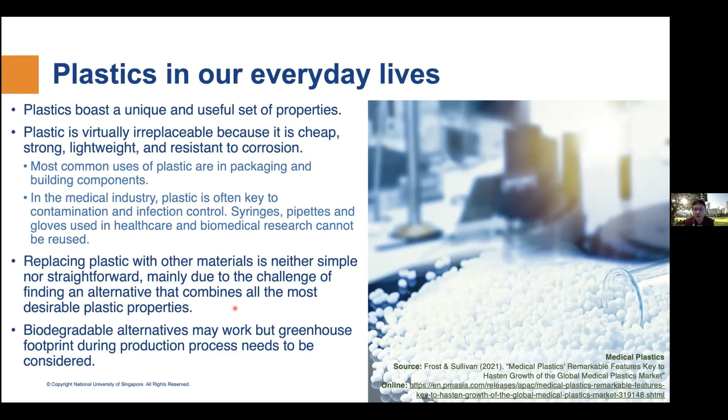Biodegradable alternatives may work, but the greenhouse footprint during the production processes needs to be considered for a holistic life cycle assessment. And as such, we know that we will have to live with plastics, and the waste that comes along with plastics. So this brings us to the issue of the waste management problem that is associated with plastics production and plastics use.

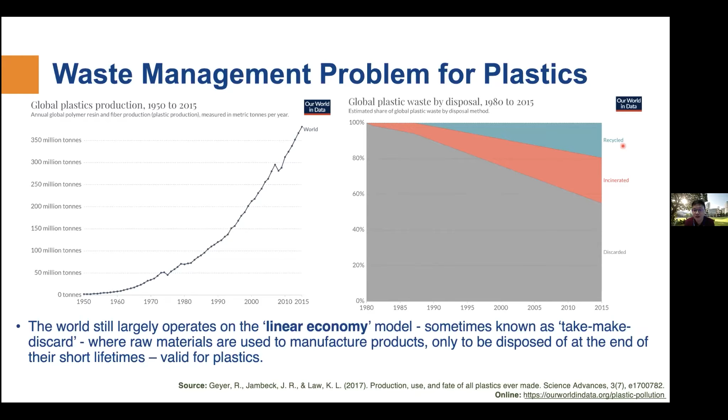Now, the fact that plastic waste is mainly discarded or incinerated shows that the world still largely operates on a linear economy model, also known as a take, make, and discard concept, whereby we use the raw materials to produce the products, only to dispose of them at the end of their short lifetimes. And this obviously is creating a problem with waste.

The most common plastic waste globally includes, number one, LDPE, low density polyethylene, followed by PP, polypropylene, followed by PP&A fibers, which are polyester, polyamide, and acrylic fibers, HDPE, high density polyethylene, and PET, which is what you see for plastic bottles, like polyethylene terephthalate.

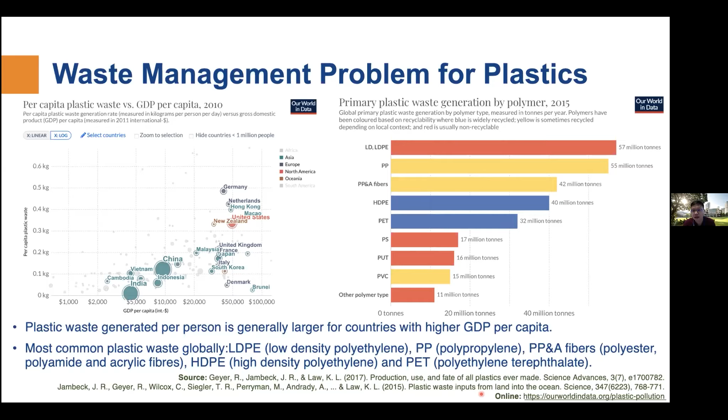So how would plastic waste pose a burden to urban cities? Number one, it will place pressure on landfill space, especially in a very highly dense island state like Singapore. There is already a space constraint for cities.

As a city gets more and more urbanized, there is a high increase in density for the urbanized core, and there will be urban sprawling. Eventually, there will be pressure on finding space for landfill.

Once the space has been dedicated for landfill, from an urban planning perspective, it will create some long-term risk considerations, including perhaps soil and groundwater contamination due to the breakdown of the byproducts of plastics.

And once it's buried, we do know that there is no material recovery. And in some cities around the world, landfilling tax may be introduced to ease the pressure on dumping incinerated waste into landfill.

Now, incineration also poses another problem because toxic gases are released into the environment, especially during the thermal degradation of PVC. As such, there is usually a need to invest in costly infrastructure for air quality management.

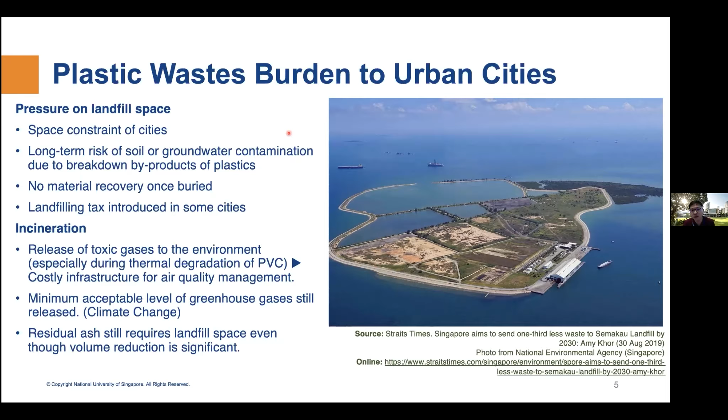Now, if we are not able to do the incineration, or there is a constraint on landfill space, what could urban cities or countries do?

Some cities may choose to export their waste. Usually it will be exported to developing countries, but developing countries usually may not have the infrastructure to minimize the greenhouse gas production caused by incineration.

And there may be mismanaged plastic waste, especially in coastal regions, which can have serious implications to the environment.

And it may not be a reliable option for the long term, especially when waste importers such as China stop accepting waste. This would place a burden on reusing or actually disposing of the plastic waste or general waste.

Now, should the waste be reused, then there is a need to consider the impact of such waste reuse on the urban environments in cities.

For example, recycled materials and the use of recycled materials should be comparable to existing materials over the entire life cycle. This is expected for any new material or recycled material that is going to be developed in this process.

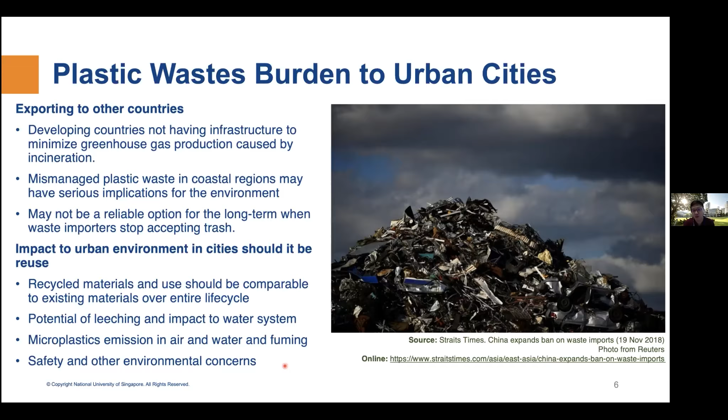Now, one possible solution is to use plastic waste on roads, and hence the topic of today's presentation. Plastics on roads could be used as a means to actually divert plastic waste away from the landfill and the expensive incineration process.

That are at risk of harming the environment, and instead put them into the pavement infrastructure that already occupies the city's lands. So the thing that we need is to find an economical solution to make it work.

Now, plastic materials are being recovered in the process and repurposed. Hence, we are trying to create a circular economic model for plastics by generating demand at the end of its lifespan. In other words, we are looking into the sustainability aspect of this issue.

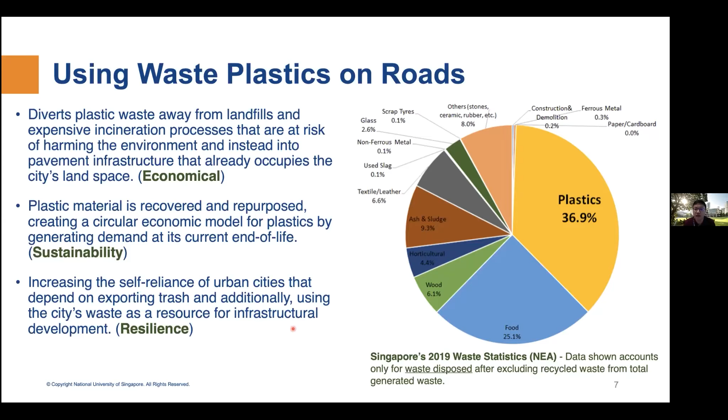Last but not least, it increases the self-reliance of urban cities that strongly depend on exporting waste to other cities or countries. Additionally, we are using the waste as a resource for infrastructure development. So these are some of the potential benefits of using waste plastics on roads.

Now, traditionally, there are two approaches of adopting waste plastics on roads. Typically, the waste is collected, then sorted based on type and cleaned to make sure there is not much contamination, so that it's suitable for use as construction materials.

And then the plastics may be converted to pellets, shredded to about 1 to 2 mm size, or ground into powder, depending on the use of interest. Thereafter, there are two approaches that we may adopt in road building.

First is what we call the wet mixing approach, whereby we add recycled plastics into bitumen at high temperatures, typically higher than 150 to 170 degrees Celsius, to form a homogeneous modified binder or bitumen solution before addition into the asphaltic concrete mixture.

Another approach is to treat the pellets or powder as mineral fillers or dust and replace a proportion of the aggregates used in the mix, then mix into the asphalt concrete mixture. Now, at this point, certain methods are actually proposing to first coat hot aggregates with plastics as a potential treatment method as well. Either way, the final product would be a plastic modified asphaltic concrete, and these should be tested for use in pavement construction.

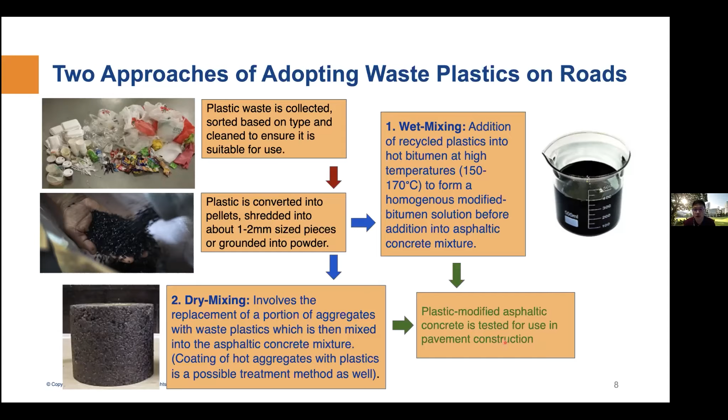Now, past studies on plastics on roads from an academic perspective tend to focus on numerical modeling and simulation. For example, the studies by Liang et al. actually model the LDPE in a tube test under hot storage conditions for a wet mix, in binder form. The one on the bottom basically shows a review done by Wu and Montalvo in 2020 that looks at the possibility of using different plastic types on asphalt and asphalt mixture performance and their general performance in this process. It's a literature study on this effort.

Now, if we are looking into mix design and testing, unfortunately, most studies in the literature tend to be focused on clean or virgin plastic type and are not really focused on waste. And this is a research problem that is to be looked into.

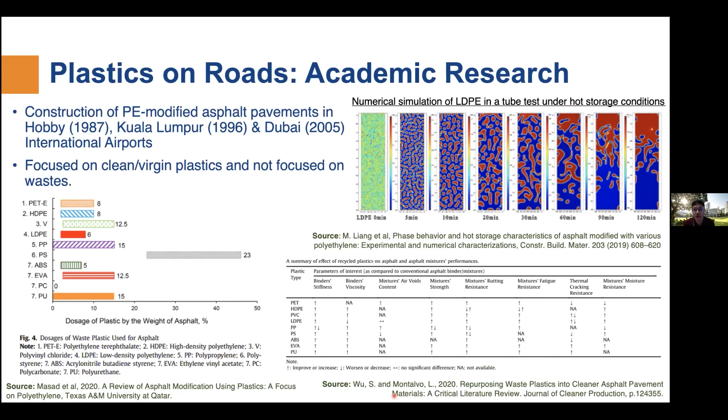Now, from a translational research perspective, we can also learn from the use of waste plastic on roads from other countries. For example, in UK in 2019, research and trials for real-world tests across 8 local authorities in Buckinghamshire, Bedfordshire, Cumbria, Staffordshire, Kent, Reading, Suffolk, Solihull, and Birmingham in the UK have been tested using plastics modified asphalt.

In Tasmania, a stretch of road has been built using additives, basically a wet mixing approach, made from plastic bags, bottles, and toners. These toners are basically in the dry mixing approach. So for the plastic bags, it will be wet mixing; glass bottle and toner, basically dry mixing approach.

In Thailand, they have started some experimentation on plastic use in roads. Indonesia has a 700-meter plastic road, where the plastic is melted and added to tar to make roads, done in Bali. And in India, where plastic modified asphalt roads have been used, over 100,000 kilometers have been built.

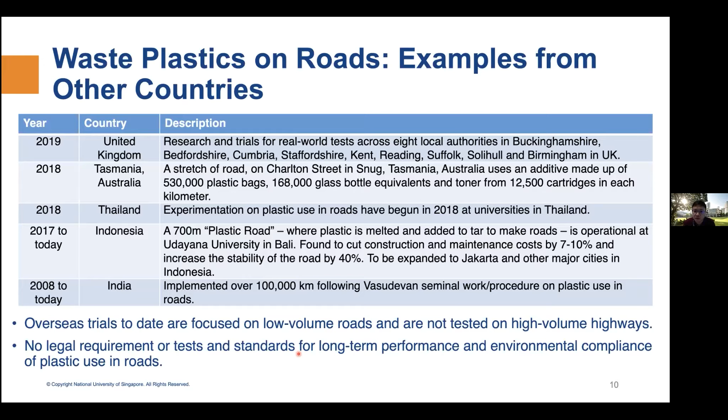Will these roads with recycled plastics pollute our water resources? Are they going to fume? Or are they going to perform as well as the current conventional asphalt mix that we have, in terms of structural performance and functional performance? Hence, in the next few slides, I will talk about the challenges for urban cities in using recycled plastics on roads.

Now, despite the past trials, cases, or implementations in other countries that I've mentioned, and I've mentioned that they are on low volume roads, what's so unique about urban cities? The first thing we think about is that there has to be a waste collection system and a waste sorting system in place. And for urban cities, it's a little bit more challenging in this aspect.

Now, in terms of waste collection, production of virgin plastics is often much cheaper than recycling plastics, and this can make recycled plastics on roads a much more cost-inefficient manner for application.

Mechanical recycling processes are expensive, and we are not able to sort the plastics efficiently. This is especially so in urban cities, where the infrastructure has already been constructed, making it extremely difficult to modify or create a new waste collection system in a developed urban framework. In terms of contamination, plastic waste collected may be contaminated from use and must be cleaned before it can be repurposed. So these are some of the challenges from a waste collection point of view.

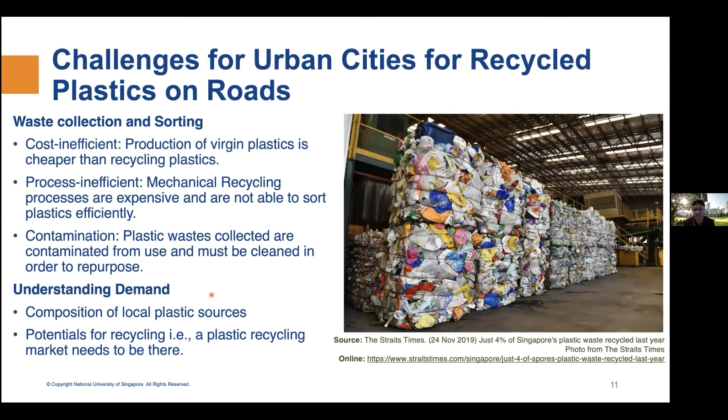Now, once we understand this part, the next part will be to look at the performance issue. Long-term life cycle costs to agencies and users should be equal to or better than the existing pavement being built. In urban cities it's extremely difficult, because the concerns are very different from local and private roads, mainly due to legislation and public expectations. Typically, urban residents have higher expectations on environmental quality, noise, air quality, or even water reuse. These are very intimate concerns, even safety.

The next one I want to talk about is environmental health and concern, because workers may be exposed to toxic fumes, even though past research studies showed there isn't really a significant difference. Or when microplastics break down and leach into water sources and ecosystems. So these are things that need to be investigated.

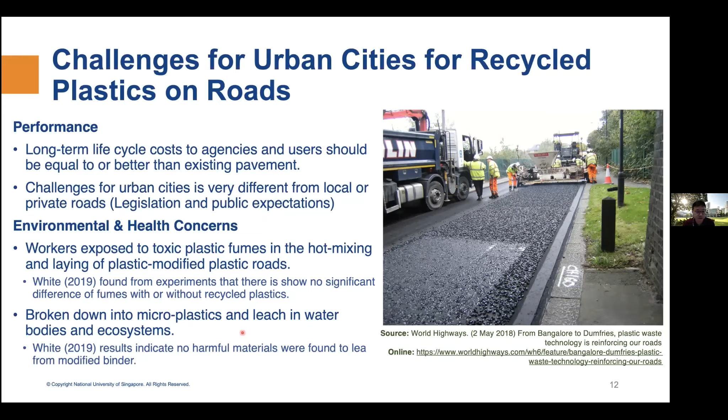Last but not least, there may be a lack of incentive or public infrastructure for plastic recycling, which I mentioned briefly earlier. Many urban cities are already very well developed and planned from an infrastructure planning perspective, and there is really a lack of public infrastructure for plastic recycling or sorting.

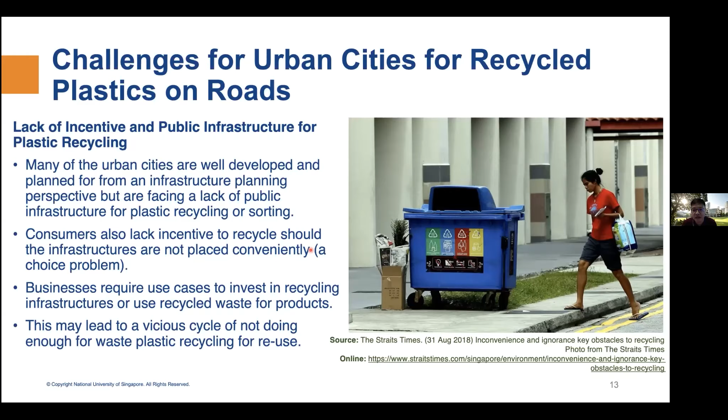Without such infrastructure, it's a chicken and egg problem. Consumers find there's a lack of incentive to recycle because there's simply a lack of infrastructure, or it's not placed conveniently. Likewise, businesses find there's no use case to invest in recycling infrastructure or to use recycled plastics or waste for products. You can see that this starts to lead to a vicious cycle of not doing enough for plastic waste recycling. So how to break this cycle is something important.

Now, in terms of that, we can look into the opportunities for urban cities. I'm going to use the Singapore context, on what we at NUS are doing, as what we are going to talk about. In terms of opportunities, the first one we'll look at is: can we actually learn more about plastic waste collection, sorting, composition, and the quality for road use?

We all know very well that Singaporeans use 1.76 billion plastic items per year, yet less than 20% of them are being recycled. Other urban cities also face similar challenges. But we should not see this as a challenge—we should see this as an opportunity.

We can actually study the waste generated from a categorical point of view, spatial point of view, and temporal point of view, because this leads us to understand more about what's being collected. If we know what's being collected, we can design waste collection and sorting mechanisms for a circular economy appropriately. From a long-term perspective, we can also study the implications on mix quality and long-term pavement performance that needs to be assessed. This will also lead to building good quality control and quality assurance guidance or standards for the plastic pellets or waste pellets generated for reuse, since we're now looking at providing a use case for investment to come into the circular economy framework.

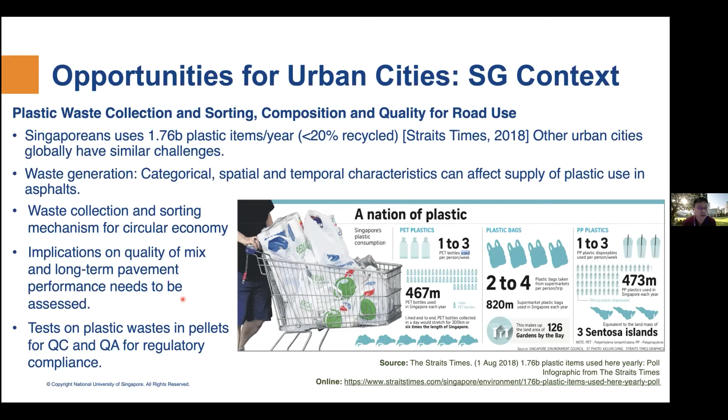Now, in terms of the asphalt mix design, the first thing we need to look into is performance. Basically, it has to be compliant with local structural performance and stability performance from a binder point of view, aggregate point of view, safety point of view, urban cooling point of view, and noise point of view. You'll notice that all these points are key critical issues that any residents in urban cities will be concerned about.

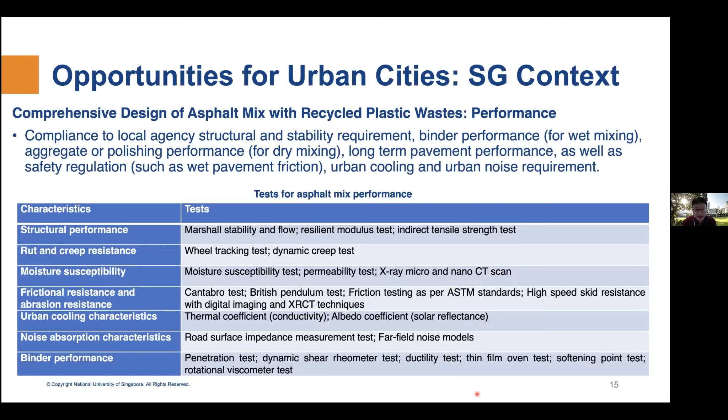Now, other than that, a lot of people may not have actually studied the environmental aspect. When I talk about environmental aspect in the Singapore context, any runoff, drainage runoff, storm runoff from our roads will go into our water collection systems and eventually be recycled as new water for us to use again. And we need to know whether there's leaching or microplastic in water, so that we know that such use does not create a burden to our water recycling efforts. So these are something that we need to look into.

At the same time, fuming during production and laying is important. And microplastics or nanoplastics in air during operation, during production, during laying also need to be studied. And there's a whole suite of chemical tests and physical tests that can be conducted to analyze this aspect.

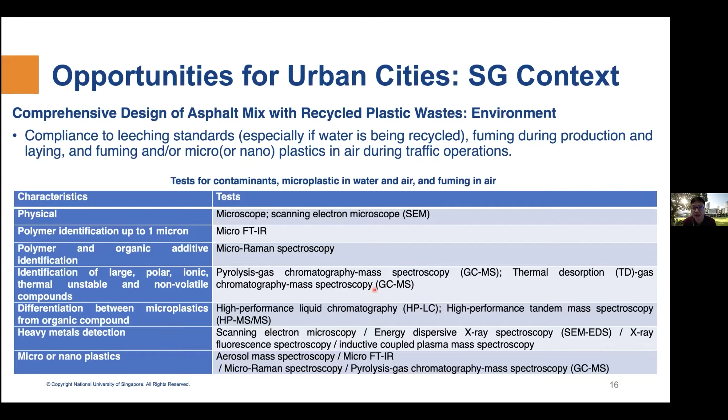And the third opportunity that comes into it is after we have the performance, we have the environmental, it passes the performance and environmental specifications. Can these waste plastics used on roads be reused again? Because now we are talking about a circular economy. So a true circular economy would have recycled content in the recycled pavement roads again. So we need to see whether the recycled pavement roads can be reused, to give the new recycled plastic roads a new lease of life.

And in doing so, we need to develop standards. And these would then provide a use case for investments, especially in waste collection, sorting, and production.

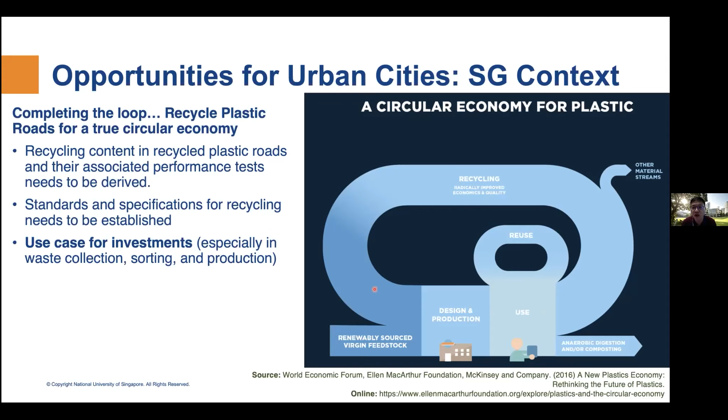So basically, we look into demand and collection systems, consumer, producer, collectors, and recyclers' perception and surveys, and how they can affect the entire plastic supply chain and the circular economy. And from the plastic that we collect, what kind of plastics to use? And how do we design a mix using a wet mixing approach or a dry mixing approach? And if it's a single plastic use, how are we going to use it? Or if it's a mixed plastic use based on, let's say, seasonal demand, how are we going to design it? So these are very critical research problems that we are doing right now in NUS.

And once we have that, how about its performance? Mechanical performance in strength, functional performance in terms of comfort, riding, safety, and then whether it causes environmental problems: microplastics in water, microplastics in air and fuming in air, and also weathering. Whether it ages faster or slower, or performs better or worse when aging compared to the conventional mix.

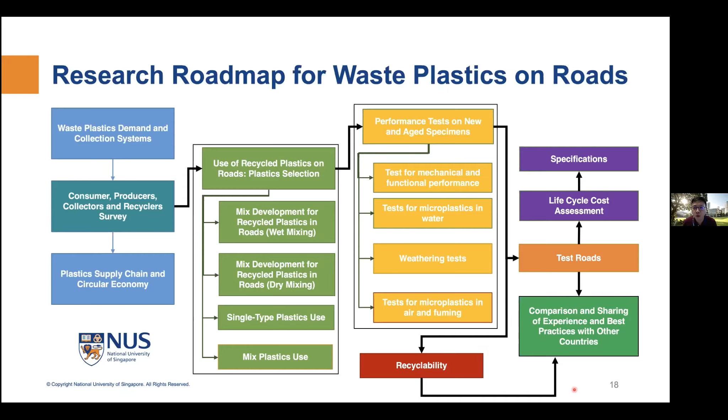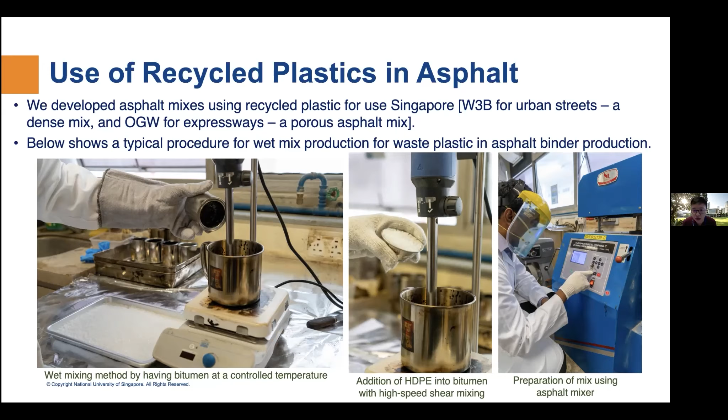So the next few slides, I shall show you what we at NUS are doing in this approach. So we have developed asphalt mix using recycled plastics for use in Singapore. In particular, we use the asphalt mix for urban streets and also for expressways. And below shows you some of the procedure that we do. For example, we put binder into a shear mixer, and then we add recycled HDPE or any other waste plastic, I'm just using this as an example. And we do high shear mixing to blend the plastics into the binder at high temperature. And they are then put into the mixer with aggregates and additives and so on.

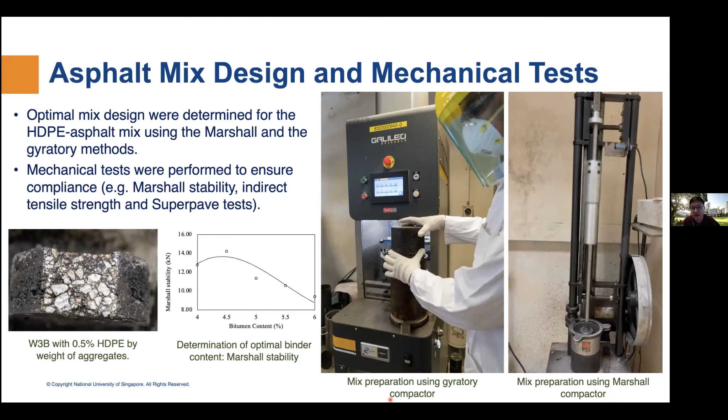So you can see that we can use a Marshall compactor approach or the gyratory compactor approach, which is basically modeling impact or by rolling of the tire. And we can do mechanical tests to make sure that it's complying in terms of compressive strength, tensile strength, and the test methods. So that is the mechanical performance in terms of strength. But not only in terms of strength, we also need to look in terms of long-term performance and safety.

And at the same time, we could also do friction tests to simulate the friction between the tire and the road surface to make sure that the new product that we are developing or the specification that we are proposing can meet the safety requirement and does not cause any increase in accidents.

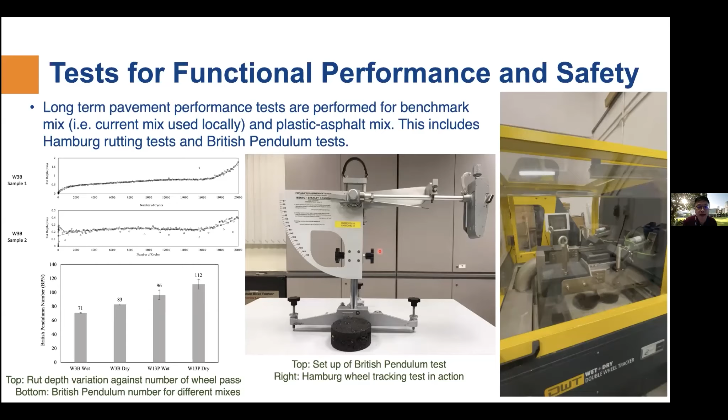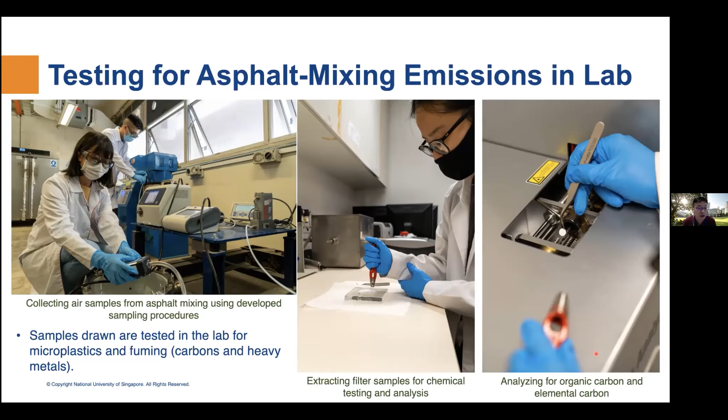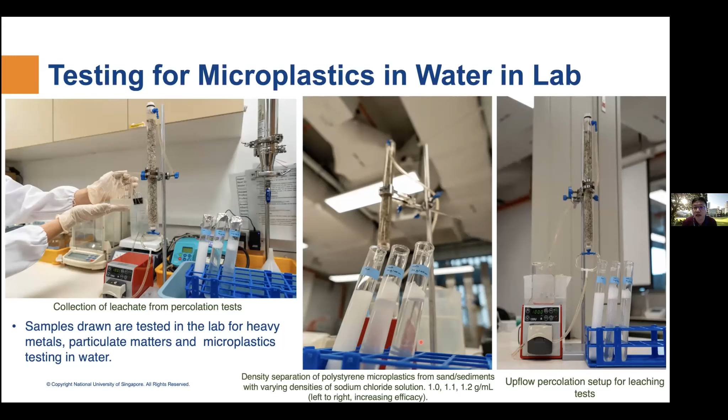Now, from the water perspective, we can also do the same by collecting the leachate from percolation tests, and an up-flow percolation setup is being shown over here on the right. And we can also do density separation. In this photo, we are using polystyrene microplastics from sediments and sands with different density for sodium chloride solution. So these can be done to test for contaminants and microplastics or nanoplastics.

And last but not least, we also can test for recyclability. So our team is also exploring the possibility to reclaim asphalt and the recycled plastic from the developed waste plastic asphalt mix for further recycling. And this includes mill dust, because in construction, we'll mill off the surface and it will come as very fine dust. And whether this dust can be reused or not. And do we need to rejuvenate the binder or add in new plastics or add in new asphalt, virgin binder, to it to enhance the performance?

And also, does the recycled plastic meet the leaching requirement, fuming, and of course, microplastic or nanoplastic in air during operations and in production? And this provides us the use case for a true circular economy, especially when we have defined standards or specifications.

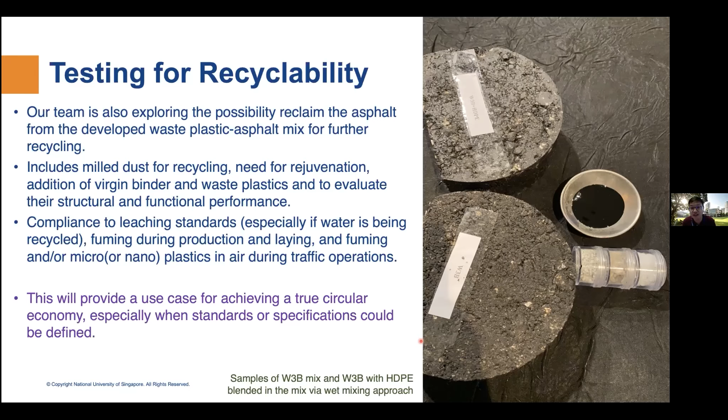Now, as concluding remarks, I mentioned that plastics are part and parcel of our everyday life, and waste can be a burden to urban cities if not properly managed. And I've discussed the potential of using waste plastics on roads. I also talked about the challenges of using waste plastic on roads in urban cities, and it's not just adding and testing for strength. There's a whole suite of functional performance, safety, noise, environmental in terms of water and air that needs to be considered in using waste plastics on roads.

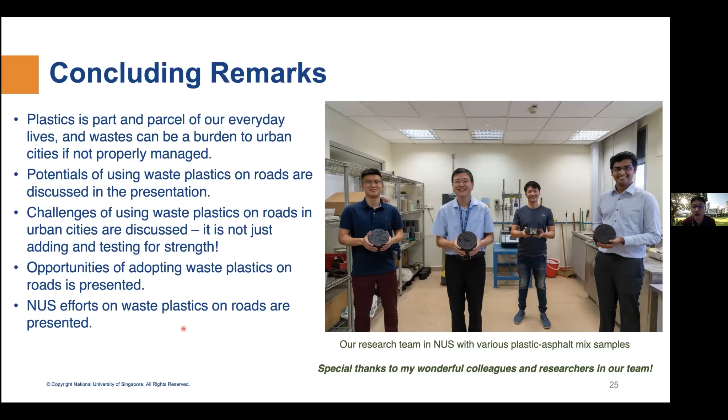But you can look at it not as a challenge, but as an opportunity to adopt waste plastics on roads. And this has been demonstrated through our efforts in NUS to study this potential option.